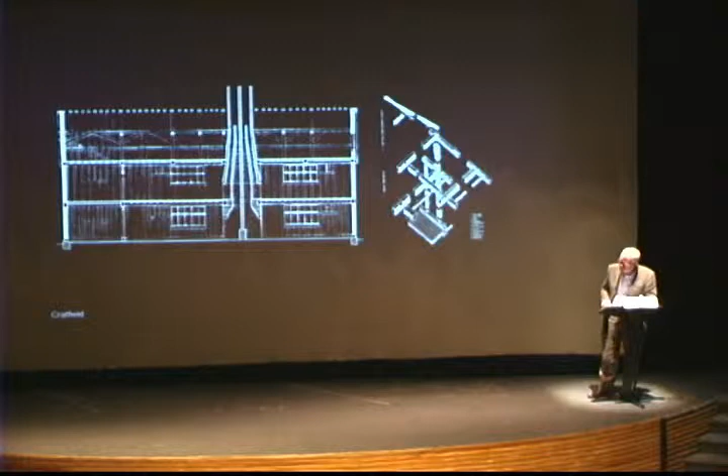Going back to the timber frame and the structure, each part was carefully sized according to its span and purpose, and connected with simple but effective timber jointing techniques. In its refurbishment, the house was sympathetically remodeled using original techniques to preserve its frame and create a series of living spaces which, when viewed in plan, have more than a passing reference to the plan of the Farnsworth House by Mies - a totally different context, yet demonstrating an interest in adapting existing buildings to modern use, in itself now recognized as a notion of sustainability.

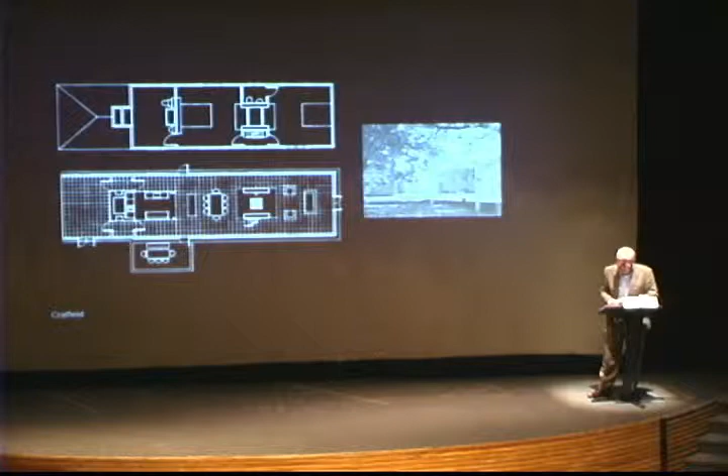This attention to detail, although you see it in its refurbished form - they no longer live in the house, but it's still there in its refurbished state in Cratfield in Suffolk. This attention to detail can be seen in the modern house which Michael and Patty subsequently built in Hampstead in London.

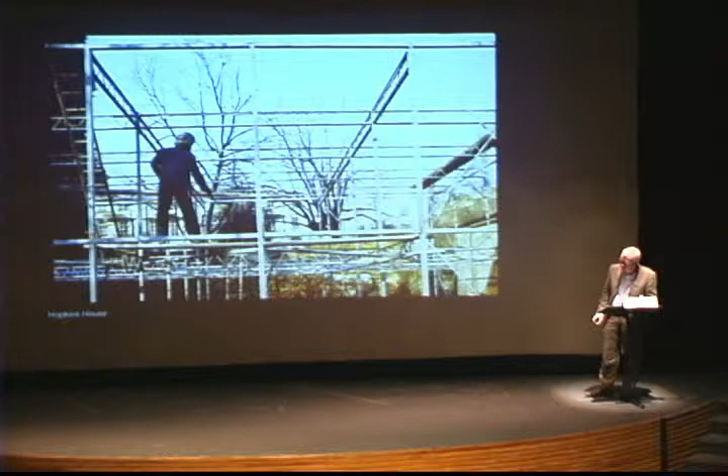This house was an exercise in minimal design in many ways. A very fine grid of small section steelwork where each part has a job to do and is designed specifically for the purpose - economy of means again. No waste and totally simple detailing. A flexible and open interior.

The resulting home served them well as an office as well as a home, accommodating 3 children, and which they still occupy themselves today. A simple expression of a lightweight solution which has a synergy with the house of Charles and Ray Eames they so admired, and allowed them to experiment with techniques later used in larger projects.

The house remains largely unchanged since it was built in 1975, except for the introduction of double glazing and the provision of improved insulation. A series of projects then followed that explored the application of these ideas to larger projects, such as a beer cellars project for the brewer Greene King.

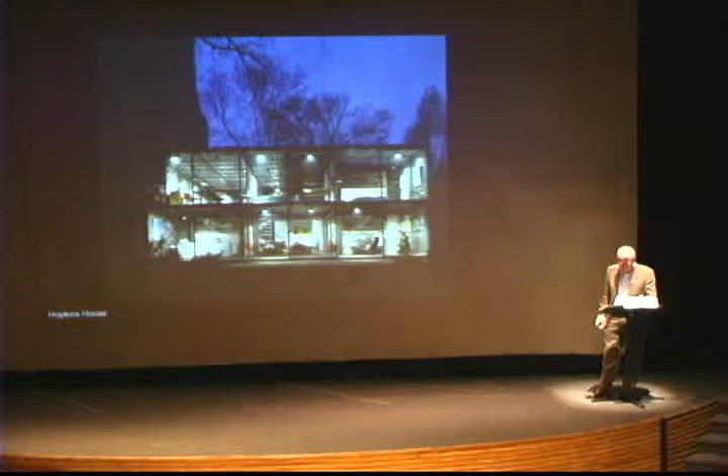The modular system for light industrial workshop and studio use, known as the Patera system, was another example, which I will show you later.

Greene King was a very process-driven design. Used beer barrels were returned to the building at one end. They were washed, filled with beer, and collected by lorries at the opposite end for delivery to local pubs. It allowed the practice to develop engineering and architectural solutions to wider spans in an equally expressive way, recognizing that economy of means can lead to elegance in the most utilitarian of buildings.

The Patera building system, around about 1970, compared with the Greene King project, which utilized many off-the-shelf materials and products. The Patera system - I'll never know whether this is named after Michael's wife, Patty Hopkins, but anyway - was really a complete bespoke solution, designed and engineered for mass production to suit a number of potential uses and sites.

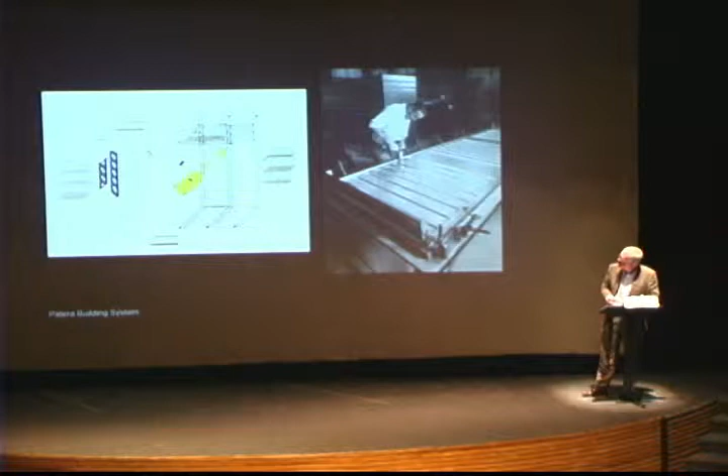Here you see the design of the modular system and the panels themselves. The trademark Hopkins lightweight external steel frame minimizes the actual building volume, saving heating costs and fire protecting the external steel. The cladding is modular so that the wall and roof panels are interchangeable. The inherent flexibility and capacity to erect, use, disassemble, and reuse in a variety of locations were key drivers in this design.

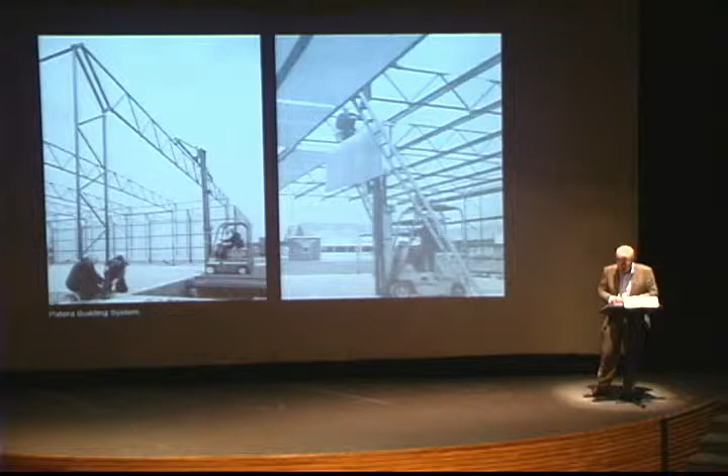Was there, I wonder, an agenda for sustainability behind the reusable nature of this design? Perhaps. A number of these buildings were made during the 1970s and early 80s. A special version was built as the studio for our practice in London, which it has done since 1984.

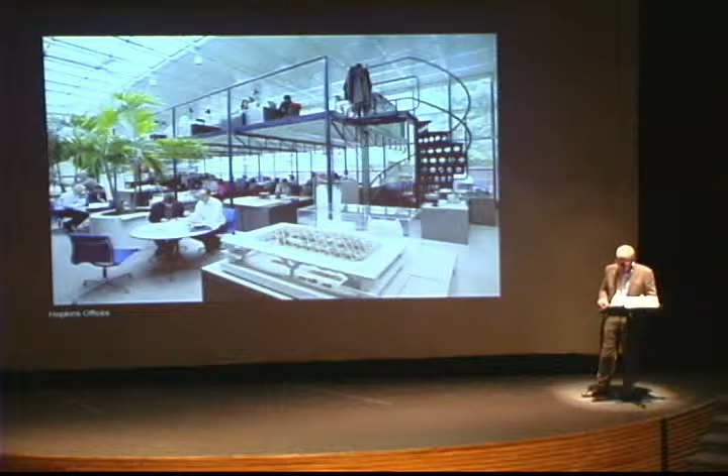Moving up a scale at the Schlumberger Research Building in Cambridge, near Cambridge, the research building took the application of large span structures in a new direction for Hopkins. The engineering of stressed skin fabric structures was to become a fascination for the practice, to be developed over many years.

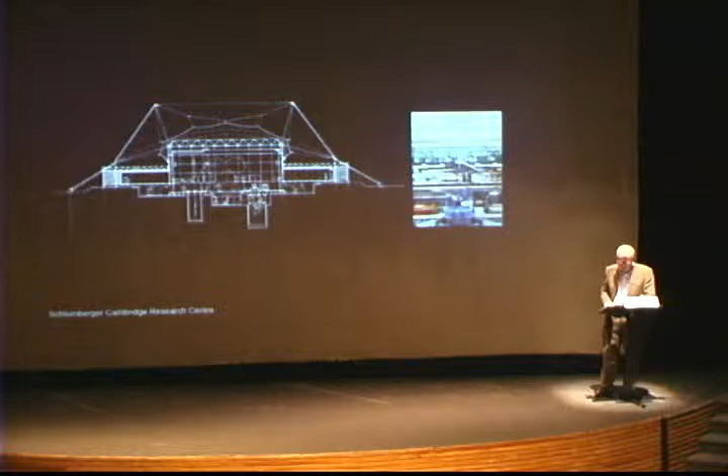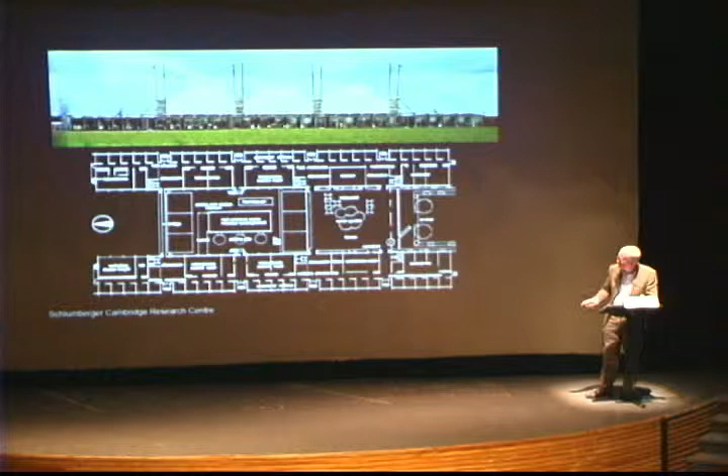This minimal and cost-effective approach to achieving an envelope for weather protection of large spaces, utilizing high-strength glass-reinforced fabric, allows light transmission and produces a very sculptural architecture. In the case of the Schlumberger building, this is to enclose large spaces which were used for the testing and simulation of drilling rigs and for the provision of social spaces for staff welfare and restaurant areas.

The theme of economy of means could be said to run through this project to some degree, although the materials had a relatively high embodied energy content. They were used sparingly and in a functional yet expressive way. This project pushed us to explore new techniques, and in doing so identified us at the time as a member of a group of architects known as the British High-Tech Architects.

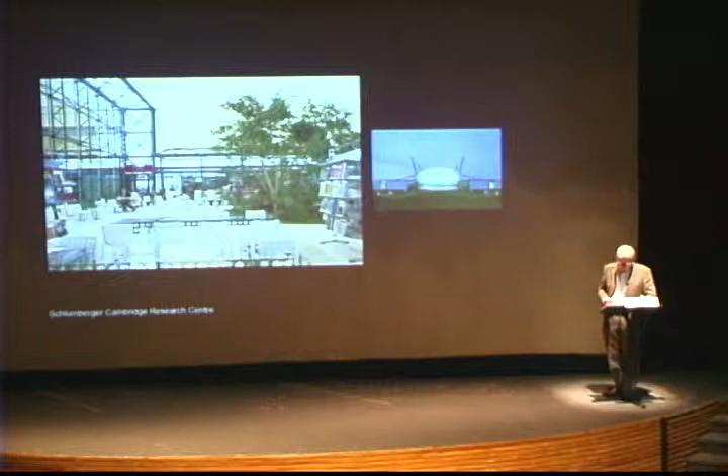The Mound Stand, Lord's Cricket Ground, London. I don't know how many of you play cricket, but a lot of people play it across the world. We have built many cricket stadia, including 60,000 seat stadia in India, where it's almost a religion. Lord's Cricket Ground in London is acknowledged by many as the home of cricket. At Lord's, each stand is different, and the Mound Stand is one of its oldest. Our task was to bring new life to the old stand.

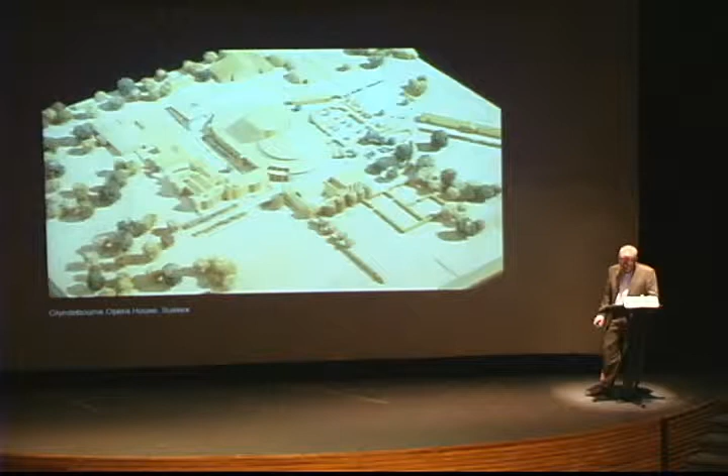This growing fascination with traditional brickwork building techniques was utilised at Glyndebourne Opera House, where we replaced an existing auditorium with a much larger opera house for summer events held in the Sussex countryside. This was not, however, brickwork used as cladding, but as a load-bearing material, as it's supposed to be used.

The study of traditional building techniques for large brick structures, such as here at the Maltings in Snape, were applied to the new opera house, and again give an architecture that has grown out of its context and with careful modelling of the exterior achieves a scale in keeping with the original house.

Fabric structure as well there. All bricks were uncut except where necessary to achieve the traditional brick bond techniques, to reduce waste. Recycled pine timber was used in the interior. So careful use of materials and form gives new life and identity to an established opera venue.

The Hopkins house in Italy, near Lucca, is another example of traditional construction where, like Cratfield, the materials could all be found within 20 miles of the location. This idea was both a source of fascination and interest, but in the current day is quite a challenge. However, like Cratfield, its restoration was true to that principle.

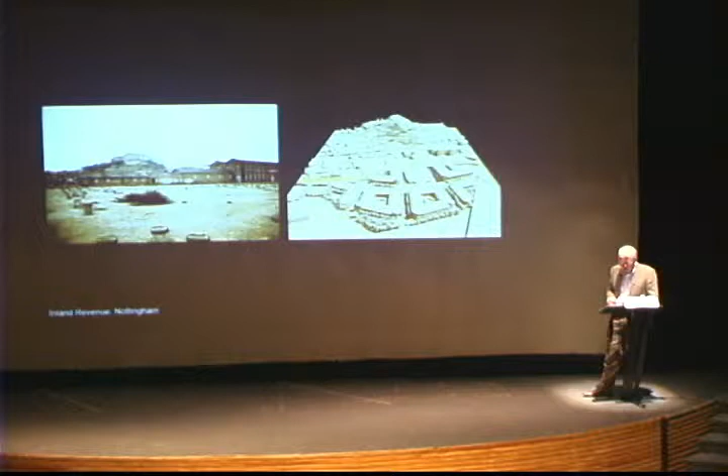But also the idea of the choice of materials came from the context. Nearby warehouse buildings of the 19th century were constructed of masonry and load-bearing brickwork using local bricks. This was a source of great excitement in the office, believe it or not. We therefore evolved a system which was equally true to materials, utilizing load-bearing brickwork piers.

Our brickwork piers were fabricated in a factory, as were also the large precast floor units, all within 20 miles of the site. I should probably add at this juncture that a lot of the development of buildings by Hopkins was done in conjunction with the London office of Arup engineers.

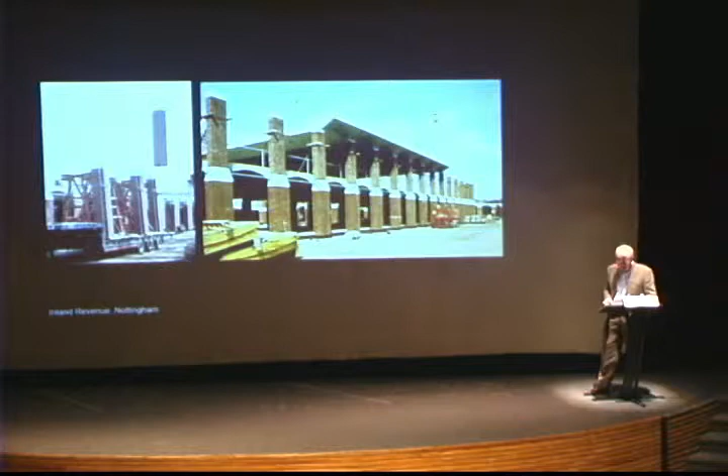You'll have met Bruce yesterday. And he's here now, so that's for you, Bruce.

Efficiency of structure suggested that the size of brick structure should increase to accommodate the increasing load as it accumulates towards the base of the building. Materials used according to purpose, again, and where required. This was strategic for a number of reasons, and also articulates the facade in a more meaningful way. Prefabrication by making the brick piers off-site saved months of construction time, very important for the short programme.

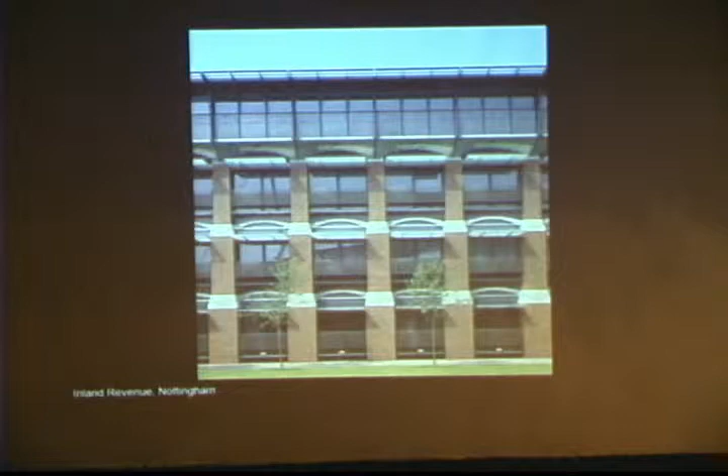This project was the first BREEAM Excellent project in the UK. I assume you know about BREEAM being the recognised method of assessing buildings' performance in energy terms. Excellent at the time was a very high standard.

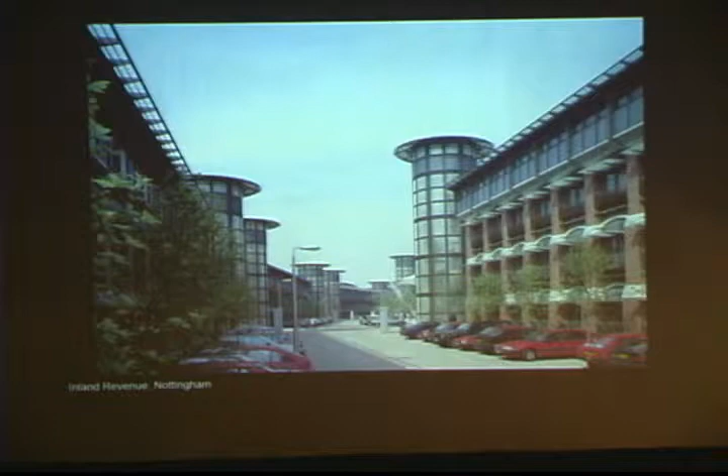The heavy structure of brickwork and concrete floors was an essential part of a passive rather than active approach to energy reduction. Incoming fresh air was used to pre-cool the building's structural thermal mass at night, giving capacity to absorb heat gains in use during the day.

The piers and shading devices that you will have seen on the facade reduce solar gain, while light shelves help project natural light deep into the building. In the summer, when it gets hot, the incoming air, which is obviously relative in the UK compared with Mexico, but the incoming air can be cooled.

Incoming air can be cooled, and as the building heats up, it is vented.

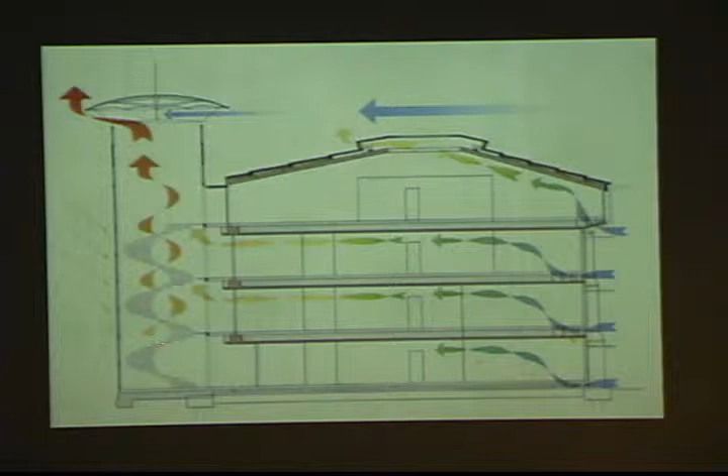You can see that the cool air coming in, absorbing the heat gains in the space, rises, and it heads towards the stair towers, and it's vented into those stair towers where the hot air is exhausted by literally raising the roof.

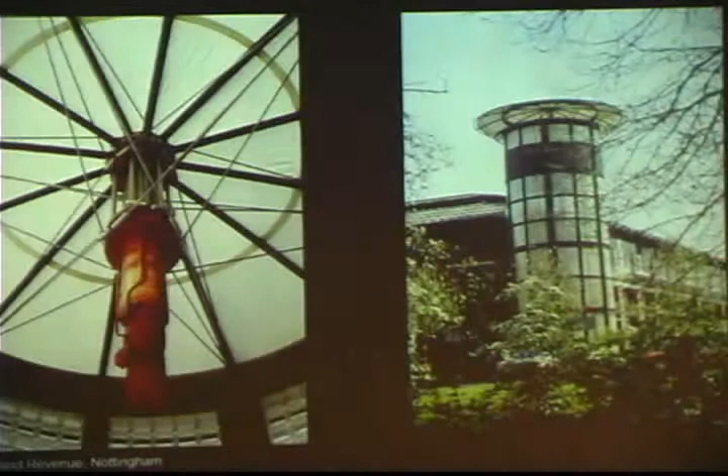These devices here are actually hydraulic rams, which are used mainly in stage techniques. We learnt this on Glyndebourne, and they are used to push up the roof and vent the hot air.

So carefully engineered contextual materials can utilize primarily a passive approach, and this summarizes really our proposal for sustainable design at Nottingham. And I suppose at that time, that was probably the first consciousness of creating a cohesive, sustainable architectural design.

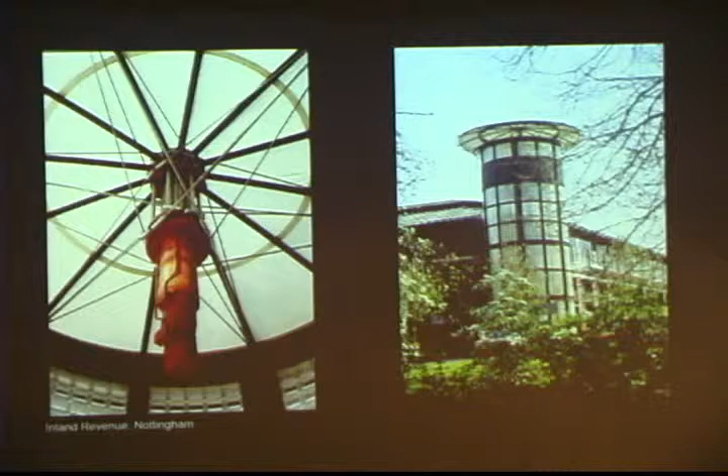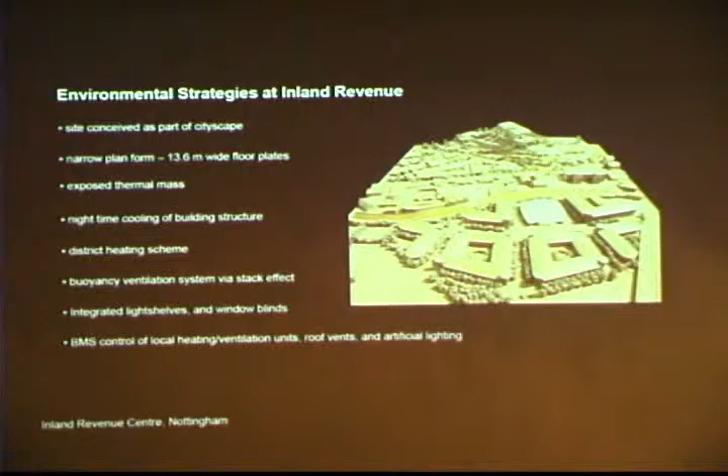This is a summary slide of basically what I've just said, so I'll pass over that.

Portcullis House, Westminster. This building was completed after the Inland Revenue project. This was completed in 2000, but these ideas were developed together for both projects.

The design of Portcullis House and the variation of the Inland Revenue project evolved out of what we thought at the time was pretty serious research carried out with Ove Arup and partners. Not just architects' research then, but also with engineers, measured research involving the building and testing of prototypes and the publication of that research, all made possible by European Union research grants.

So now we're really getting to some serious stuff, especially as this research was being undertaken in the 1990s, and is now, in many ways, fed into the ideas that have become more mainstream in sustainable design.

Some brief facts about Portcullis House. It was conceived as accommodation for 200 members of Parliament. It's located next to a landmark building that most people know worldwide as Big Ben, part of the Westminster Palace.

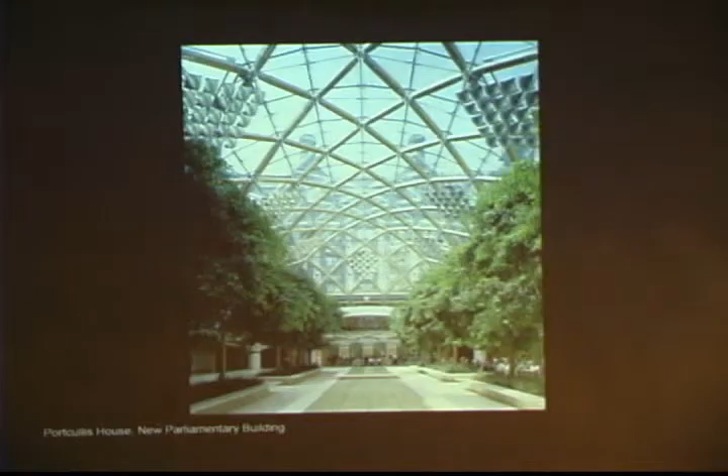It was built over an operational railway while the new Westminster Underground station was being constructed for the Jubilee line extension, which we also designed to make sure the columns connected in the right places, which in themselves have a story associated with them. The primary supports run directly through the main escalator box of the station itself from the building above.

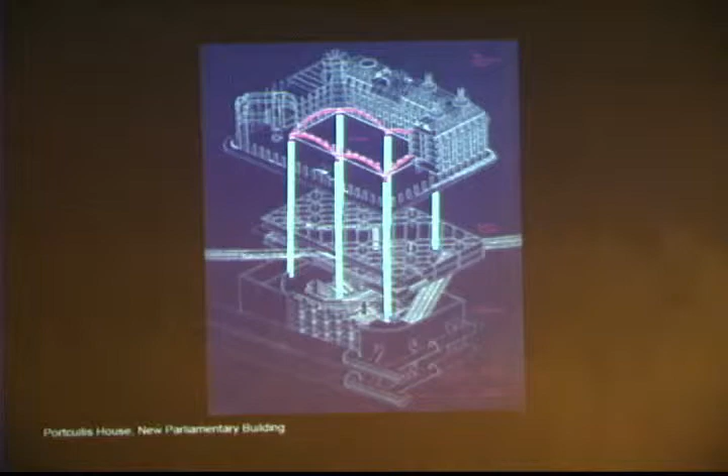The design of individual rooms for members of Parliament was informed by the research programme, and by its repetition forms the essential cell of the whole building assembly and its architectural composition.

This diagram explains in principle how each room worked in terms of its environmental characteristics. Thermal mass is provided by the soffit, these large precast concrete panels that you saw at Inland Revenue. There is a sort of sister of them used in this building. The walls between rooms were also made of concrete and provided additional thermal mass.

Hot air was delivered by facade ducts, cool air was delivered by facade ducts entering the floor void, guided into the room through floor grills, and in the space the temperature of that air rises, and by simple displacement ventilation technique the hot air rises into the top of the room and is extracted through the facade ducts again.

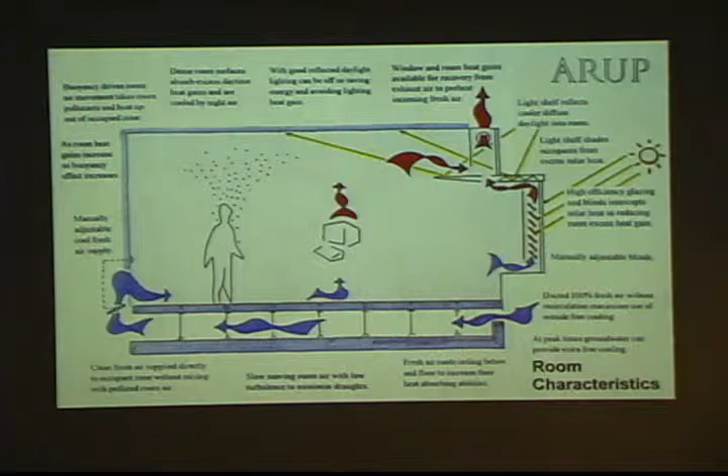The facade ducts run up the building on each side and collect in the roof plant areas, where a thermal wheel would either cool or heat the air as required, and exhaust air was expelled through large chimneys, which give the building its character in terms of the London skyline.

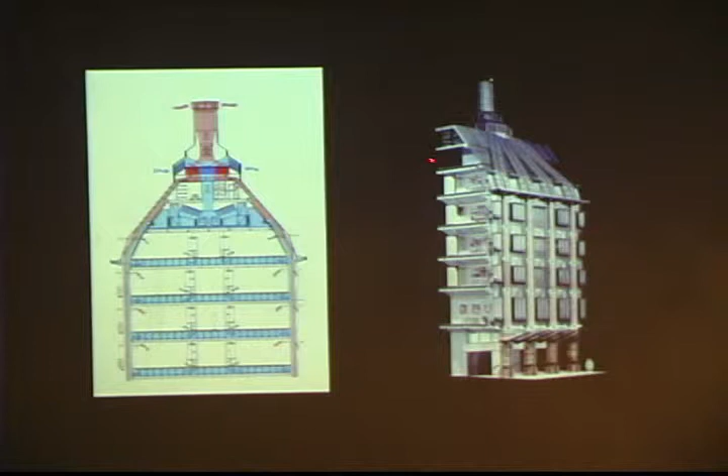These ducts, which collect the facade ducts, become roof ducts, and this spider-like configuration is actually structural, supporting the rooms and the plant areas in the roof.

Here you can see the same principle of load increasing towards the base of the building, with these load-bearing stone piers. The only metal in them is a rod used to lift the piers into position on site. There's no reinforcement, it's just solid stone.

This building really rewrote the structural code for designing stone buildings on this scale, which is quite an achievement when you consider the whole building is supported only by stone. There aren't many modern buildings that do that.

You can also see an inverse or reciprocal relationship between the facade duct geometry, which gets smaller as it comes down the building away from the roof plant areas, and the increasing size of the piers, creating an integrated services and structural zone between which the windows are placed.

You can also see the distinctive light shelves, which give it its three-dimensional character as a facade. It's a controlled, integrated approach to the elevational composition, deriving entirely from the functional requirements, with a bit of architecture as well.

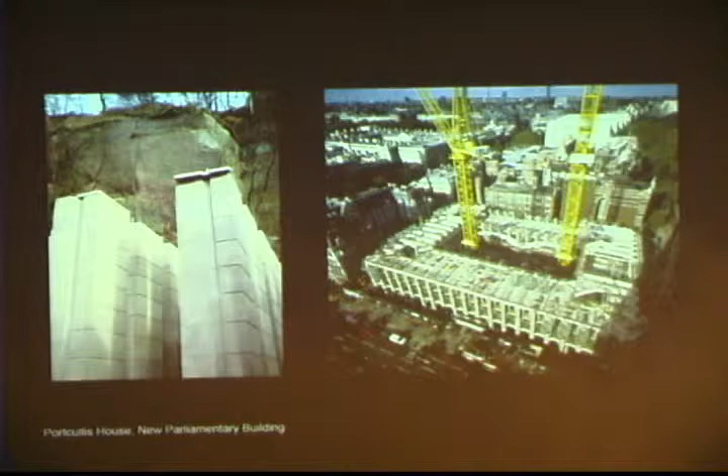The bronze used for the facade and roof was, however, fabricated in the UK. Interestingly, it was fabricated by a company called Alvis, which used to make cars and now make tanks, and were very specialised in the use of exotic metals.

Bronze was chosen for its sustainable, long-lasting and durable quality, recognising that it has a very high embodied energy content in itself, but that it would last a long time. Part of the brief for this building was to achieve a lifespan of 200 years or plus.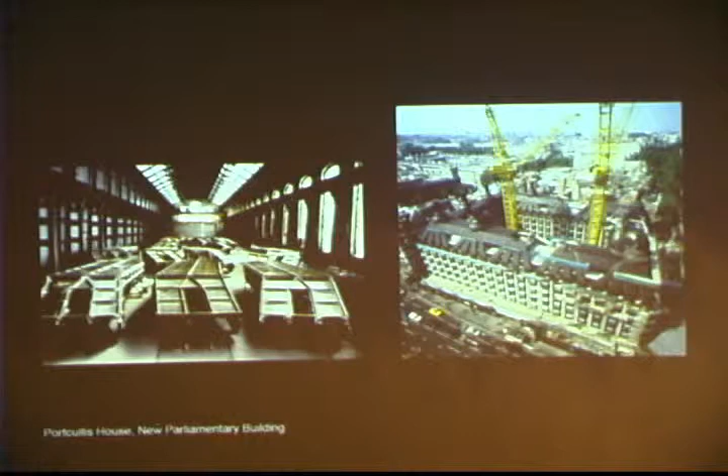Again, that's just really what I've talked about already - I won't go through that list.

The overall design was conceived to be in keeping with the adjacent World Heritage Site at Westminster, and I think you'll agree it fits in very well - architecture again as an integration of the building's sustainable features, utilising traditional materials in a modern engineering solution.

That was, of course, a very special project with, some people would say, a very special budget as well.

In due course, this project was interrogated by what we call the National Audit Office and proven to be value for money. After many different opinions about its external appearance and cost, people now recognise, 13 years on, that it is actually a building of quality, and the members of Parliament all enjoy working in the building.

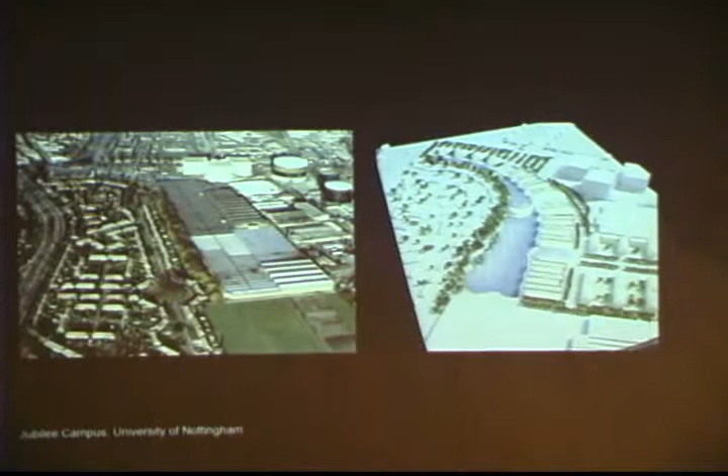2,500 doesn't sound a lot compared with your university here. Okay.

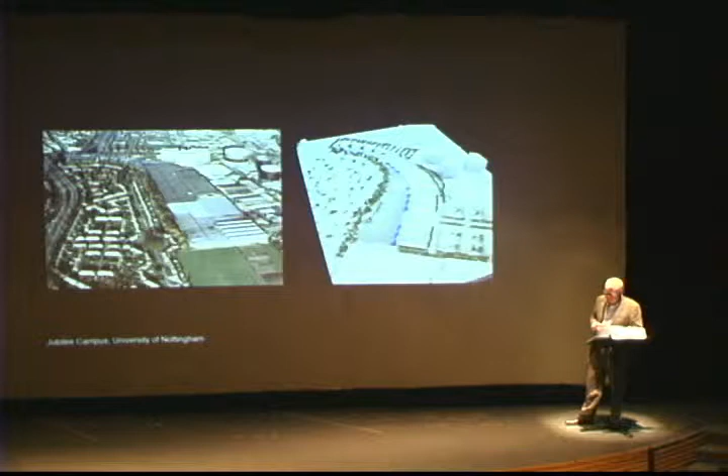I don't know how many of you use bicycles, but in the UK, for a long time, that was a preferred method of transport, and I think it's coming back. There was one trademark name known above all others, called the Raleigh bicycle. Raleigh now sourced their materials from the Far East, so they had no use for the factory, which was sad, but also represented an opportunity for the Jubilee campus to be built.

A serpentine lake was created following the line of the only remaining feature of the site once the factory was taken down, this belt of trees along this side.

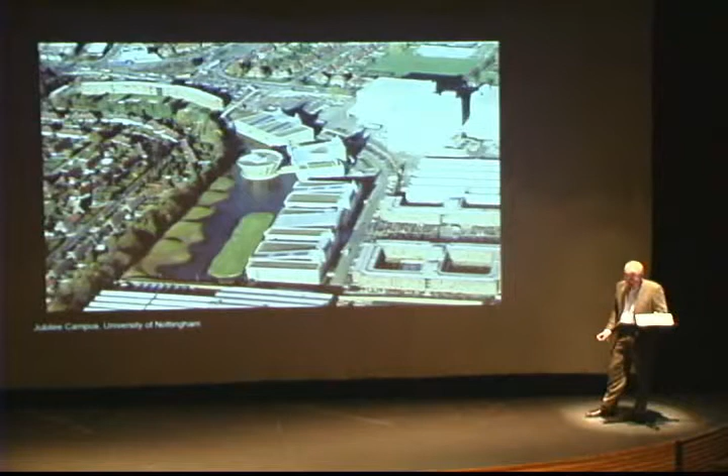Along that lake were arranged the principal faculty buildings, a learning resource centre and central teaching building. Here you can see the learning resource centre, which is a sort of inverted cone, a sort of spiral, interestingly, so there was a continuous circulation - quite an interesting idea.

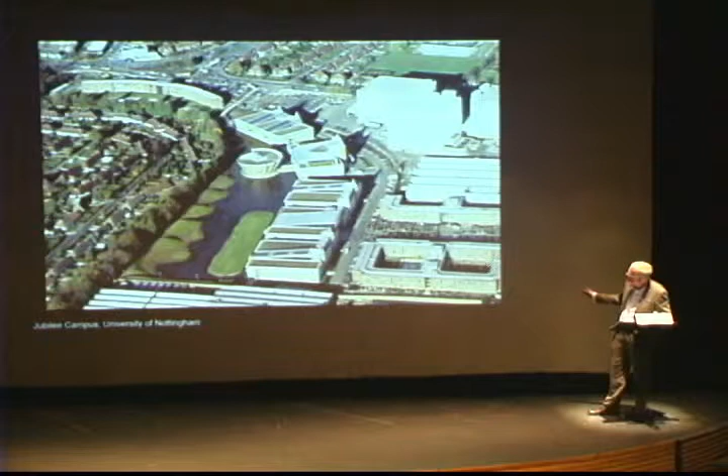The central faculty building was here, other teaching blocks here, and of course the lake, and some student residential buildings, more student residential here, and water.

A colonnade on the front of the buildings forms both a connection between these buildings and a link within the overall campus, leading from playing fields to the main existing campus. It has views over the lake and gardens and engages with restaurants, shops, and other meeting spaces at the ground floor level.

Here you can see the lecture halls. These are lecture halls stacked one above the other, the smallest at the bottom and the largest at the top, to purposefully create space at ground floor level around which people can meet before they go to their lecture.

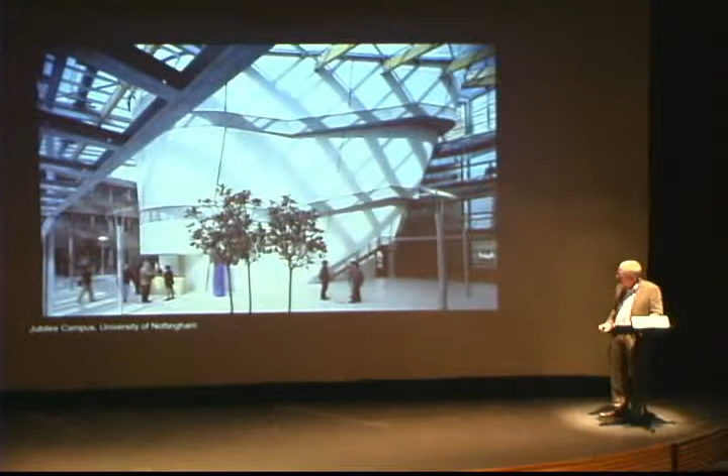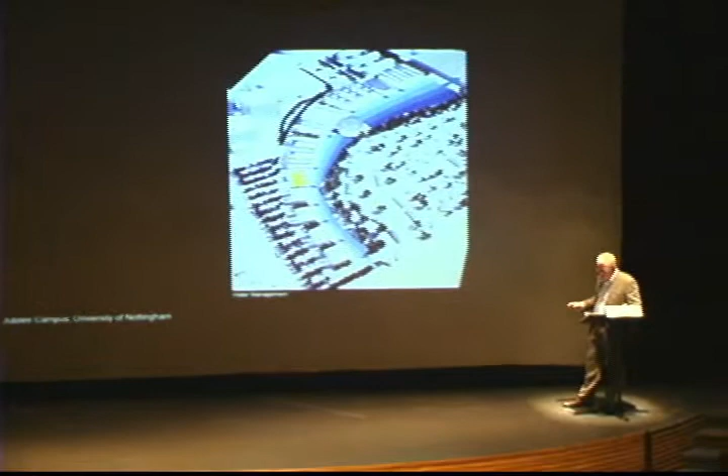In terms of the overall master plan, the lake had an importance not just as a landscape feature, but to collect water, and in doing so create a cooling benefit, helping to cool the prevailing wind that in turn assists with the cooling of the faculty buildings.

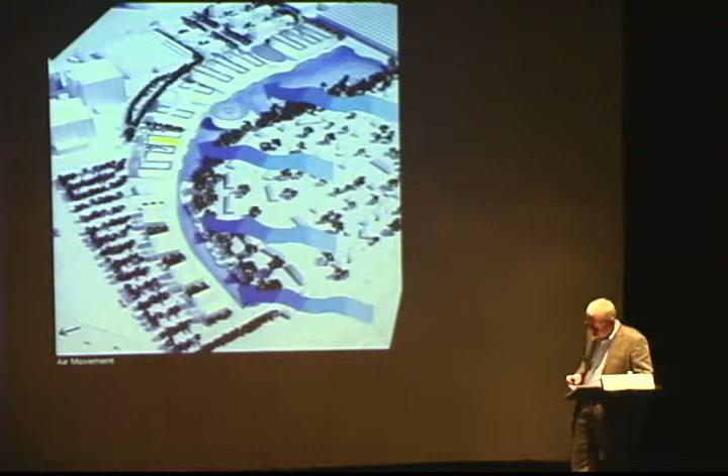Sedum roofs, which is a type of grass, provide biodiversity and add to the overall landscape concept of the scheme.

Now, this was a university project on a budget - probably one of the lowest budget projects we've ever done, certainly at that time. The program and costs were so constrained that the constructional technology was forced to be as simple as possible, the emphasis being on refinement and rationalization of detail.

So the main 3-story buildings have simple in-situ concrete frames, providing thermal mass again to assist with the cooling. These frames are clad with a modular system of prefabricated timber panels and openable windows.

I refer to the question made to Michael earlier about the use of timber, which in the UK's sustainability guides gets a sort of AAA rating, really. So I think in the context of sustainability, certainly we understand it as being a good material to use, but obviously recognising that it has a limited life - though it can also be renewed and replaced.

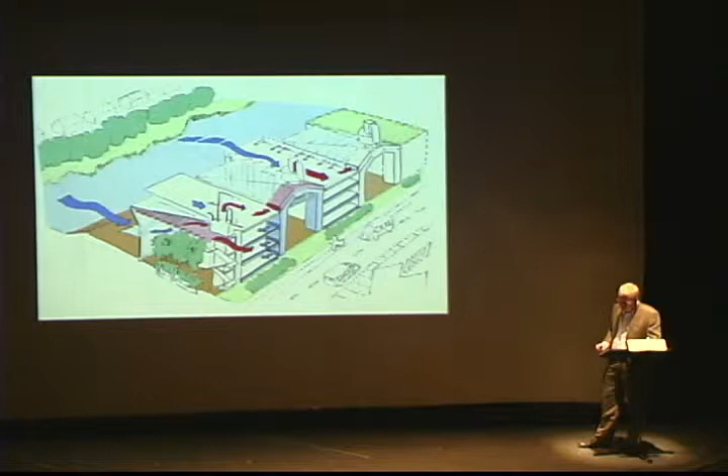A low pressure drop ventilation system, again with the cooling benefit of the lake, uses corridors and stair towers as air plenums, reducing the energy needed to circulate air and cool the building. The stair towers are a development of those at the Inland Revenue, utilising the staircase as a duct for extract.

But with rotating cowls which respond to the prevailing wind direction. Under normal conditions, the wind is enough to exhaust the air, which is again subject within the building to this low pressure differential effect, and the effect of buoyancy within that system.

During hot weather, the photovoltaic cells, which are used to provide solar shading over the glazed roofs between the blocks, generate supplementary power for fan-driven ventilation.

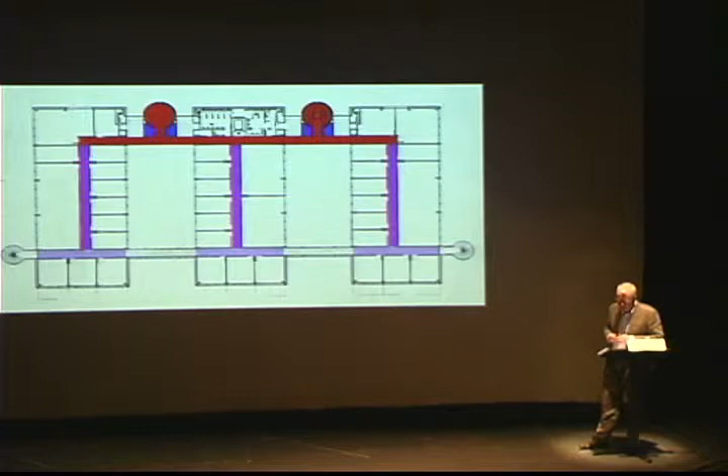So, in terms of our sustainability timeline, the campus project was an opportunity to expand our thinking in terms of master planning a whole complex of buildings, to take advantage of site features and planning, and to maximize the sustainability opportunities of a project of this scale.

The buildings themselves are modest. Planning and form are primary considerations. Active measures were kept to a minimum, and the energy consumption, for anybody that can read this slide, indicates that consumption was less than half of that of a best practice building of that time. Best practice buildings now are considerably different.

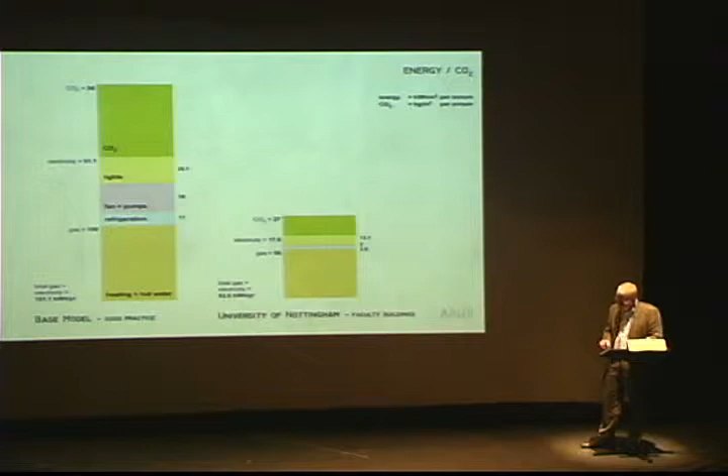We go over the pond to Yale Forestry and Environmental Studies building, which was located behind an existing 19th century stone faculty building, quite a domineering building, behind which a backland area had developed and deteriorated over a period of time to become a dumping ground for materials and unwanted stuff from this and other departments around, pulling down the quality of the area. Several adjacent buildings also were pulled down in quality. Generally, it wasn't cared for and it wasn't loved, and it was really a waste.

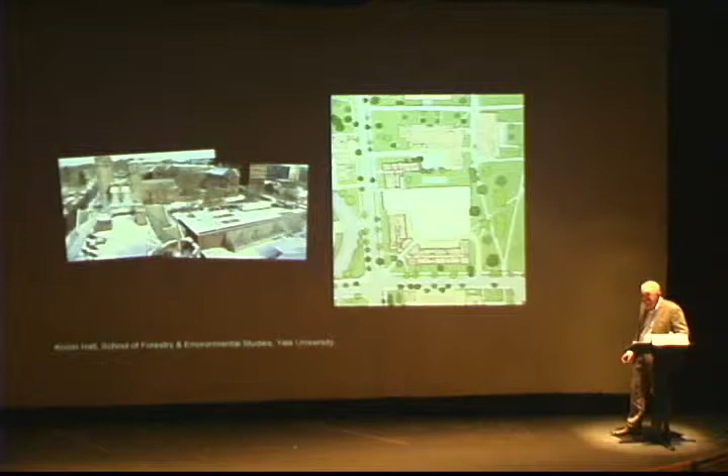Our job was to find a solution which breathed new life into this area, as well as creating a new forestry and environmental studies building. This was an opportunity to introduce a new building, loved space. These spaces have now become places for people where students gather and move from one building to another. People seem to take pride in them, and they are kept in a reasonable state and condition.

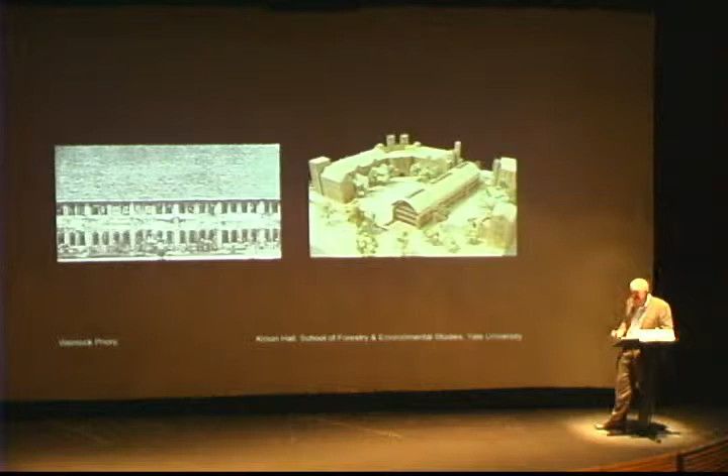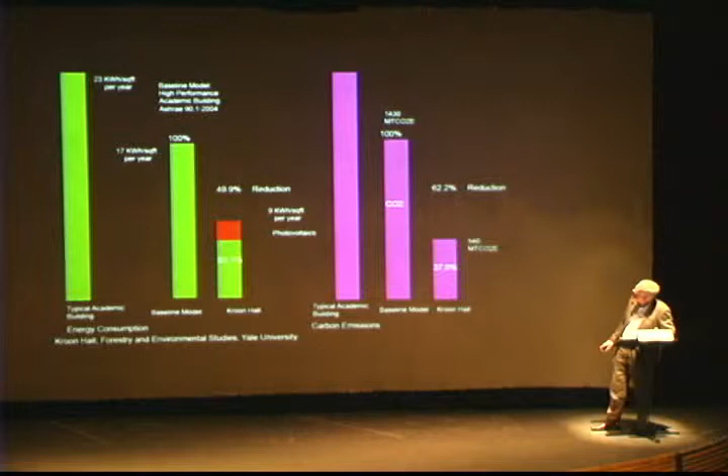It goes without saying almost that any building for a school of environmental studies should have a very high energy and sustainable credential, and the features of this building are many, achieving a rating of a LEED Platinum building and 50% or greater reduction in energy consumption and carbon emissions. The use of timber throughout the interior gives it a particular character, and the students seem to like it.

Moving on to Princeton, the Frick Chemistry Laboratory in New Jersey. One of the aims here was to design a building that set a new standard in energy efficient design for chemistry research buildings in the US. This is no mean feat, really, quite difficult for a building so full of highly serviced research equipment.

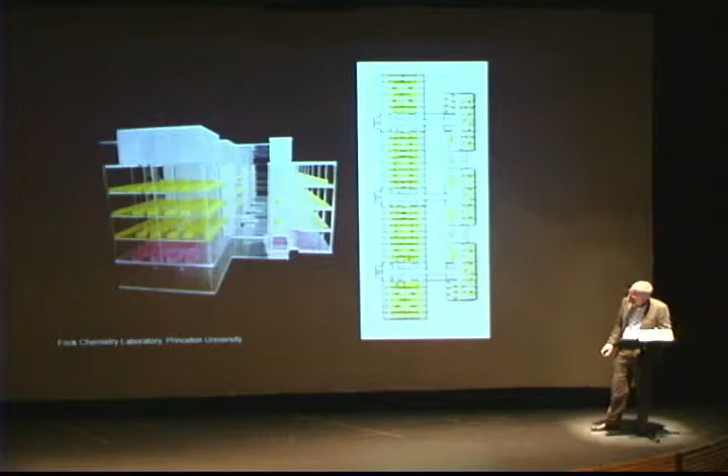The outcome is a project that incorporates a number of sustainable features, including one of the largest integrated photovoltaic arrays in the US at the time, a pre-manufactured energy-efficient facade, grey water recycling, chilled beams, and extensive use of natural lighting coupled with daylight sensors throughout the interior. In a way, the danger was that this building was becoming a bit of a machine, and its exterior is a particularly functional solution architecturally in accordance with its sustainable goals.

But it has people spaces too. The central atrium, which runs through the building, brings natural light into the interior, and becomes at once a route through the building and a space for events and gatherings.

We're moving up to date now with two buildings which are civic buildings, both in London, which are local administrative buildings for two boroughs, the Hackney Town Hall and Brent Civic Centre. These two projects reflect the brief of local authorities for new buildings that help them rationalise and improve the provision of services to the public and set high standards in civic design and sustainability.

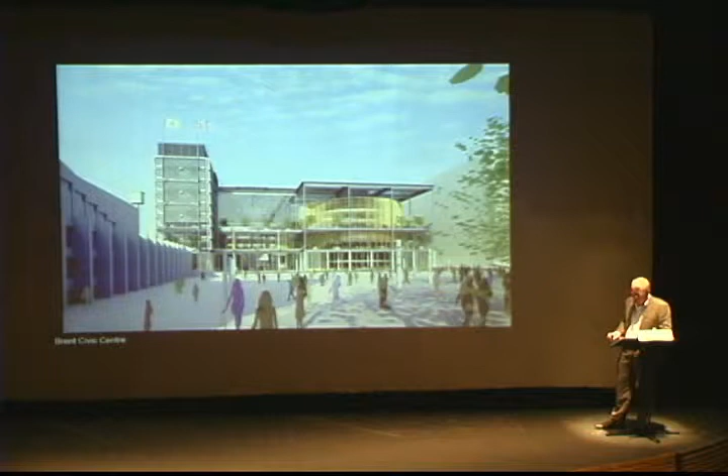The Brent Civic Centre will be our first BREEAM Outstanding building in the UK, and all the indications are that it will set the highest standard for sustainable design for a local authority building. When complete, the key sustainable features, which include a combination of solar shading, natural ventilation, high-performance facades, and combined cooling, heating, and power utilizing fish oil, will contribute to that outstanding rating.

It will also, because of its strategic location, kickstart an area of regeneration in Wembley that has previously remained underutilized for many years, despite the football. It will create a new cultural and community focus for local residents. Both these buildings allow the consolidation of real estate where local authority administrating and functions have grown up in several locations across the borough.

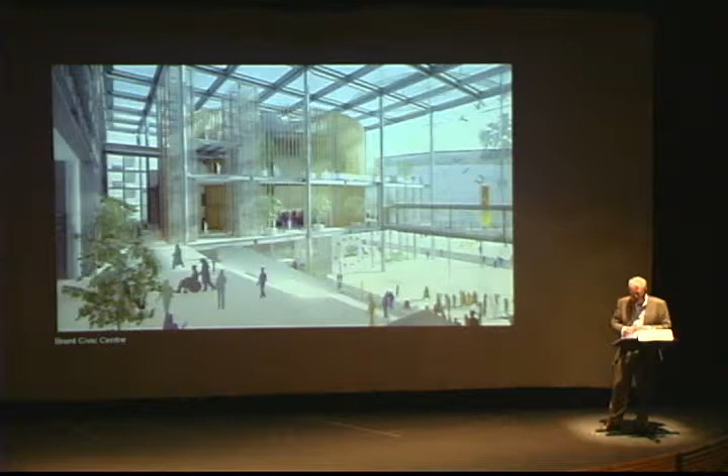These can now be consolidated into one efficient location, and these buildings are also sized to account for new ways of working. Not everybody is in the building at the same time, so why build for everybody if some are working outside or from home. These new ways of working promote efficiency and allow buildings to be sized accordingly, achieving significant financial savings for the community.

And there it is on site at the moment, due for completion later this month.

Okay, well, we're back to the Velodrome. Now this is one of the pursuit bicycles. The bicycle, over time, has become a very refined machine - light, efficient, and geometrically well developed.

In designing the 2012 Velodrome for the Olympic Games, we set out with the intention to build a building that reflected these principles. The building achieved BREEAM Excellent rating and encompasses many sustainable features in the design, but as I've attempted to set out, design is more holistic than that. It's not about ticking boxes, it's about squeezing as much as you can get out of a project.

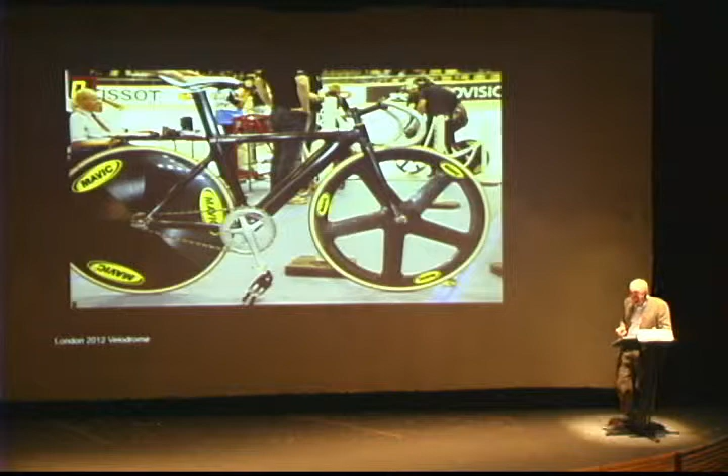In this particular instance, we were striving to achieve the lightest possible solution to the roof structure. Many of you may know about the work of Frei Otto many years ago, in his stressed structures, stressed skin and net structures, and in a way we were following that clue, if you like, to a degree, in order to set ourselves a goal of achieving this highly sustainable solution with a totally minimal approach to the roof structure.

The design of this structure - each of these is a pair of 40mm diameter cables. This design evolved out of modelling and simulation of various geometries.

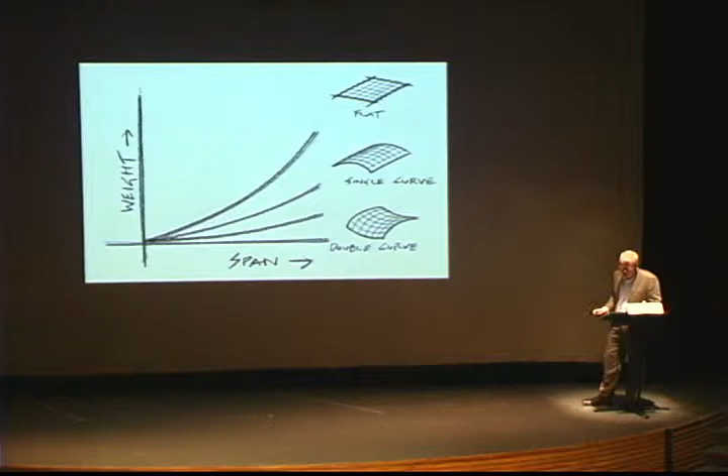You can see from this simple graph how the span and the modelling of the roofs significantly affects the weight of steel in the roof. The double curvature is by far the most efficient shape, and we chose to adopt that form in developing the roof of the Velodrome. Even so, the refinement went on to save 1,000 tons of steel in the roof compared with a traditional solution, and reduced the program by up to 3 months, which was pretty important because the building had to be finished for the Games.

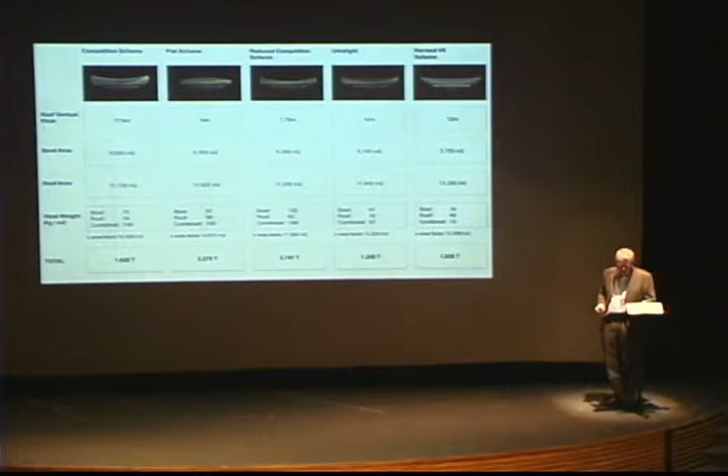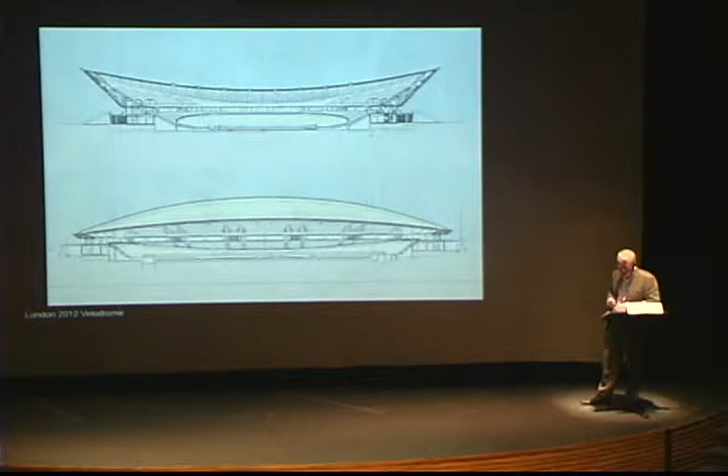The resulting form also facilitated benefits in terms of the air extraction patterns and created a low building envelope ratio to the building footprint size. We're pretty pleased with the solution, and we were very glad to win some gold medals at the Games as well for the cycling within this building.

This is one of the buildings which had a clear legacy to it. There was a cycling club on this site before works began, and that cycling club will occupy and use the building, which will no doubt also be used for national events.

Okay, in conclusion, I think it's clear that sustainability is not a separate discipline or something that the engineer applies to an architect's design to make it work. It's something, we believe, embodied in the thinking and integrated into the final architectural solution. It entails consideration of the broader aspects of the project - of planning, regeneration, of contextual considerations, of material and technology choices relevant both to the context and the demands of the program, and recognizing the broader aspects of energy generation and the need for reduction of carbon emissions.